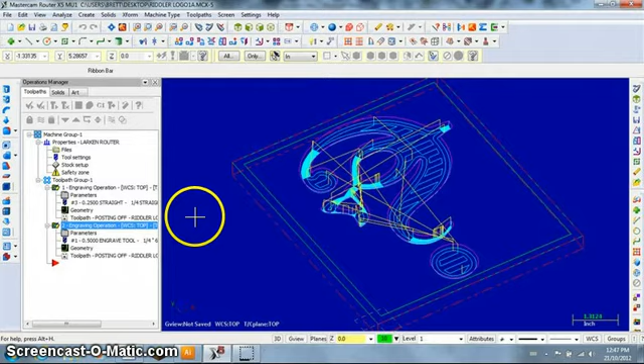So let's move over here to the 1/4 inch parameters. I want to left click on engraving parameters and focus in here. We have a depth cut of 1/10 of an inch. Now, a general rule here to follow is you never cut deeper than half the diameter of your bit. So in this instance, I would be okay. Half of a 1/4 inch is 1/8 of an inch, or 0.125, and we're only cutting to 1/10 here, so we would be okay.

There are other variables, though, that factor in sometimes. Material hardness - different woods obviously machine differently. For example, in this first exercise we're going to be using MDF material, and although it machines really nicely, it is quite abrasive on the tool itself because it's mainly made of glue, and it will heat up the tool bit substantially.

So even though we're within the rule we should follow here, I'm going to recommend that for the longevity of the bit, anytime we can keep the bit cooler, it's going to last longer, and I don't want to be replacing tool bits every class or two. So I'm going to suggest you left click on the depth cuts here and just add another cut. What that does is increase the time it takes to machine it, but the tool will work a lot less hard and won't get nearly as hot.

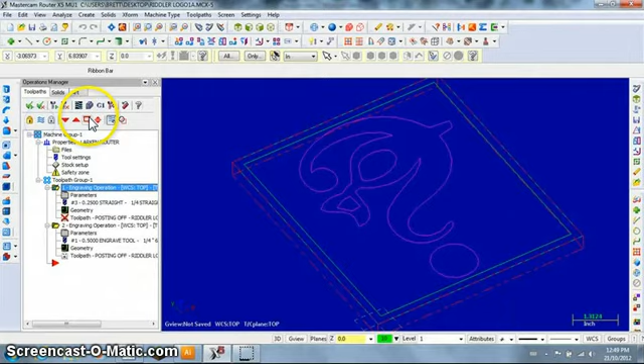So you'll notice now I have to repost this. Okay, so when I zoom in here and look at this now, you'll see two blue lines, and those two blue lines are equal depth, and they go down to a total of 1/10 of an inch, and that's the two passes that it's going to make to get to the total depth of 1/10.

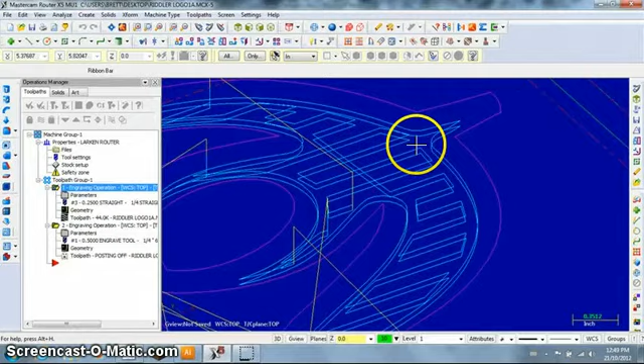Okay, so we're going to do the exact same thing on the other one as well. I'm just going to left click on the parameters of this tool. This is the engraving tip tool. Same thing, I could probably get away with just leaving this, but for bit life, I'm going to change it to 2 cuts, and click OK.

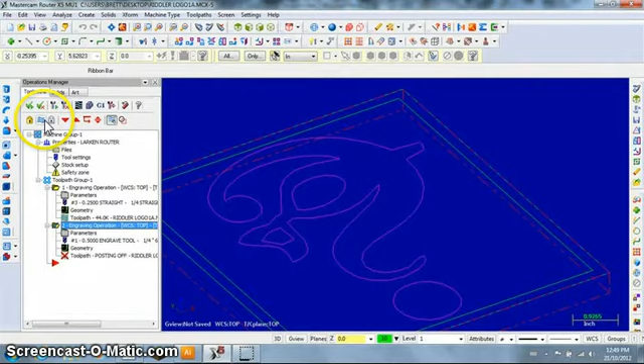And I'm going to do this, and there we go. Okay, so we now have our depth of our tool bits checked, and that's good.

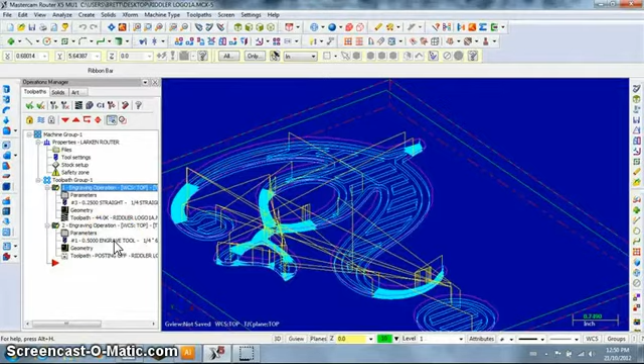This next step, though, is where most mistakes happen when G code is being made. Each tool that we have used in this program creates its own file of program code, and if you only have one tool, there's less chance of you making a mistake. But we need to make sure that each tool size is identified in the name of the file that becomes the tool code. So for this particular one, we want to make sure that a 1/4 inch straight engraving bit

is added into this name of Riddler Logo 1A. And same thing down here, this one over here, we want to make sure that the engraving bit 005 engraving bit is added into the name here.

That way, when we're actually loading the program into the controller of the CNC router, we can verify and make sure the right bit is in the router at the same time, so you won't be trying to cut the wrong program with the wrong bit. Here's how you do that.

You want to make sure that only one of these is selected. I'm going to change this one first. You can see I have a check mark on this folder, which means I'm in the 1/4 inch toolpath. I want to right click on parameters, move up to edit selected operations, and move over to change NC file name.

All we're going to do here is add the size of the bit into the file name. I'm not going to put decimals because that sometimes screws up the naming structure. I'm going to put 25 straight bit. I know when I load this into the program, I'll be looking for a 1/4 inch straight bit in the router.

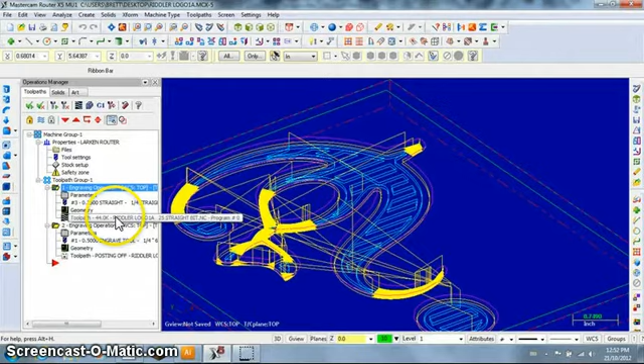And we can verify down here that it now says Riddler logo 1A 25 straight bit.

We're going to do the exact same thing to the engraving bit parameters. I've selected the folder, got the check mark on it, right click on parameters, move up to edit selected operations, move over to change NC file name, and on this one I'm going to put 005 engraving bit, just adding it to the name.

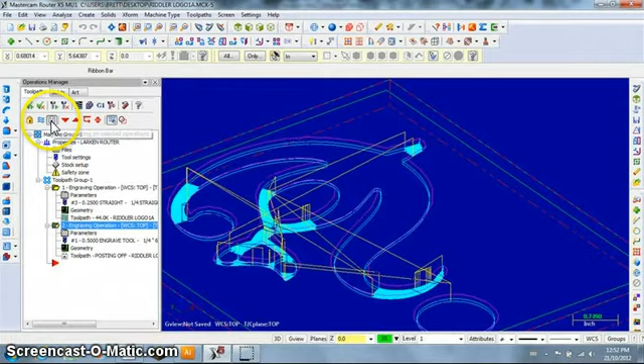And we're done. Okay, so the next step is we want to make sure that both these folders are selected. It doesn't really matter which one is selected first, but while holding the shift key, left click the other one, and now both are selected.

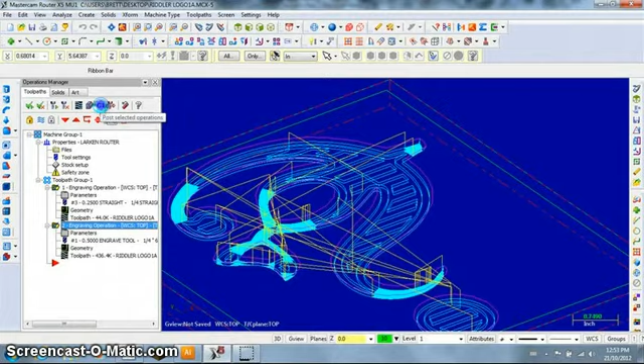The next thing you do to create your code is move up here and left click on G1. A post-processing window opens up, and we're just going to left click on the OK button.

And here is where you're going to save your files that are eventually going to be switched over to a jump drive or thumb drive, because you're going to take these files on a thumb drive over to the other machine room where the router is hooked up to. So make sure you know where you're saving them.

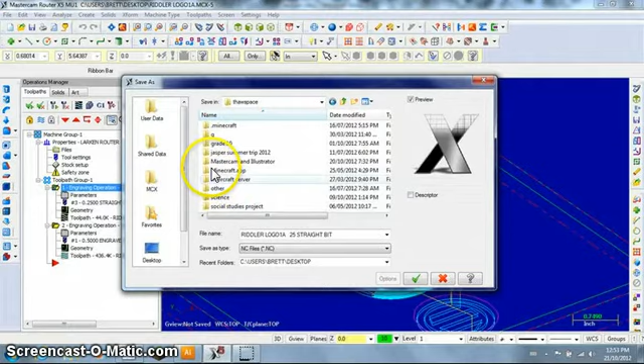I'm just going to save them in here. Yeah, it's already got the 25 straight bit name on it. I'm just going to click OK. Takes a second to process, and I'm not going to do anything yet.

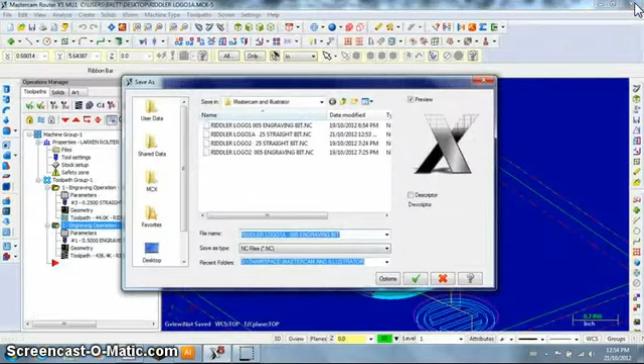I'm just going to close that off. You'll notice that the saving window is waiting for me to accept the next program name, and we've already named it. Don't have to change anything, you just have to hit save.

Same thing, it takes a second to process it, and it also will open up its file of program code. Like I said, it's just a bunch of language that the computer understands. I'm going to close it.

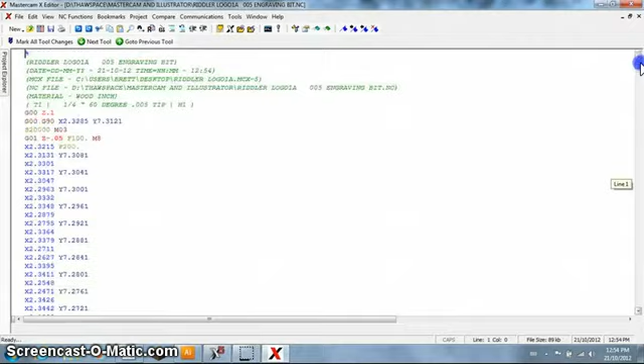And you have now successfully created multiple toolpaths, and you've saved them to an area that you can put them on a jump drive or thumb drive later and bring them over to the router in the other room, and you can actually start cutting out your part. Well done.